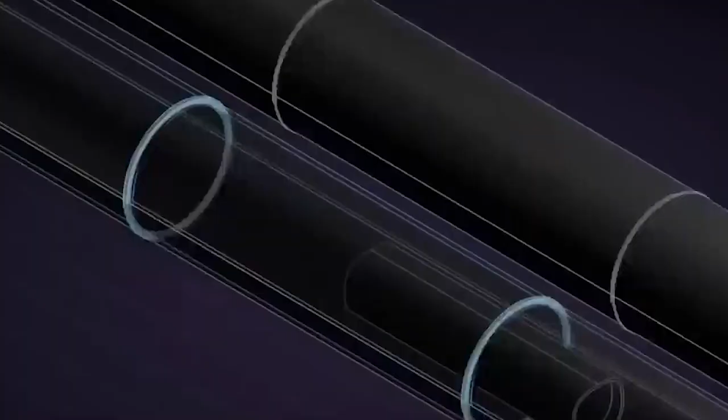Envision a journey across China that takes only 30 minutes and takes you from the country's political capital, Beijing, to its most vibrant city, Shanghai. Thanks to China's groundbreaking innovations in Maglev, magnetic levitation, train technology, this dream of unparalleled speed and interconnectedness is almost a reality. The planned ultra-high-speed Maglev train is a huge technological leap that will change how people travel forever, causing a stir all across the globe.

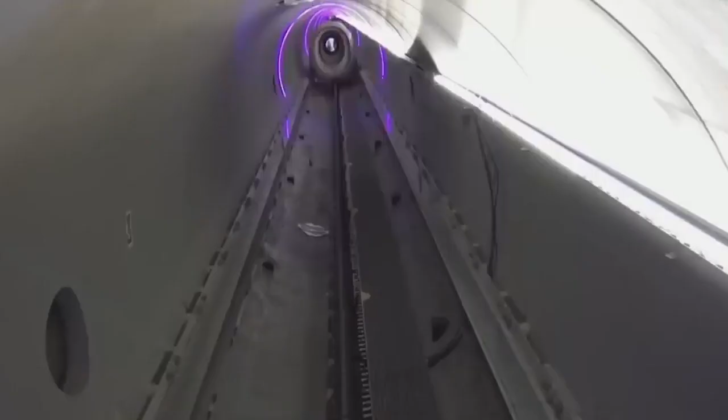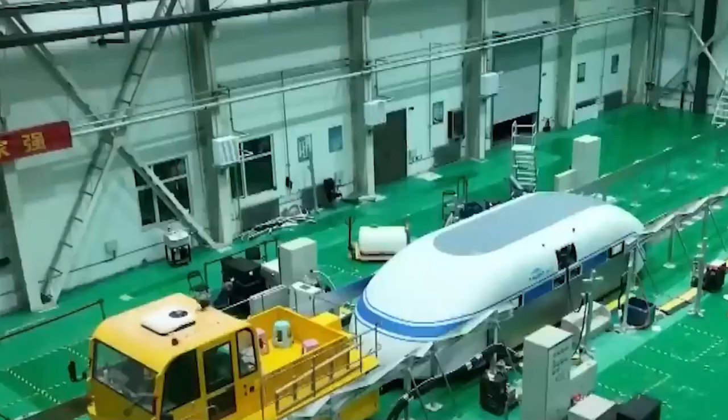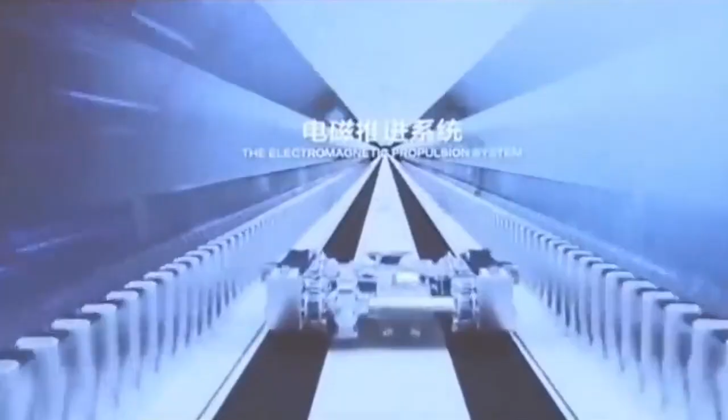The genesis of Maglev technology. Maglev, which stands for magnetic levitation, is not a novel idea. Magnets were considered a potential propulsion system for trains as early as the 1900s. The rapid advancement of this technology can be attributed to China's unwavering dedication to innovation. When it first went live in 2004 on the Shanghai Transrapid Maglev line, this innovative technology set a new benchmark for operational speed, reaching 431 km/268 miles per hour.

The ambitious leap forward. In modern times, China has lofty ambitions, including developing a Maglev train capable of reaching 600 km/372 miles per hour or higher speeds. This project aims to reduce the distance between China's two most important economic centers, Beijing and Shanghai, by linking them through an ultra-high-speed Maglev rail network.

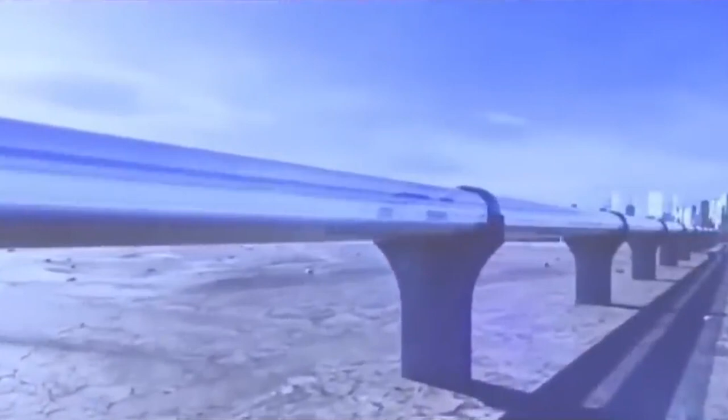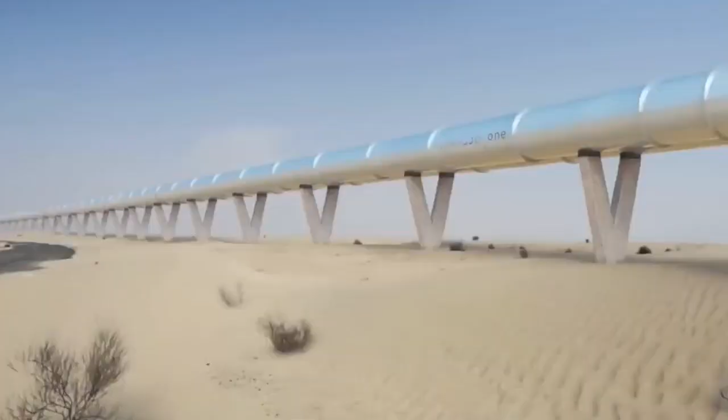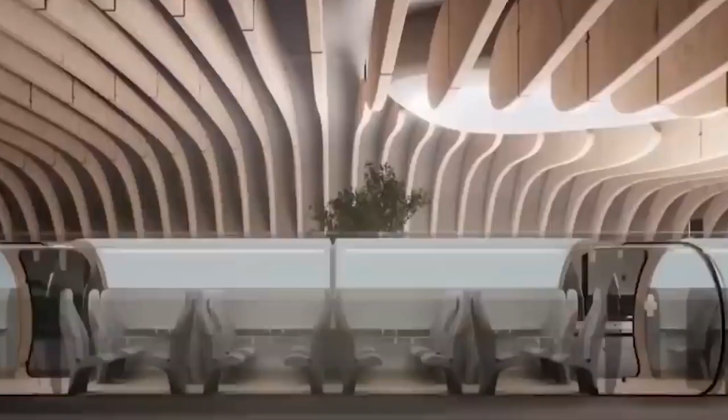Technological marvels driving ultra-high-speed Maglev. Maglev principles: how does it work? Central to Maglev trains is the basic idea of electromagnetic levitation. These trains float effortlessly above the rails, propelled by strong magnets that attract and repel one another. High speeds are possible since there is almost no friction because the train is not touching the tracks. One kind of Maglev system is the electrodynamic suspension, and the other is the electromagnetic suspension. The EDS technique, which relies on superconducting magnets to provide a steady levitation effect, is utilized most frequently in China. Liquid helium is used to cool these magnets to extremely low temperatures to retain their superconducting characteristics.

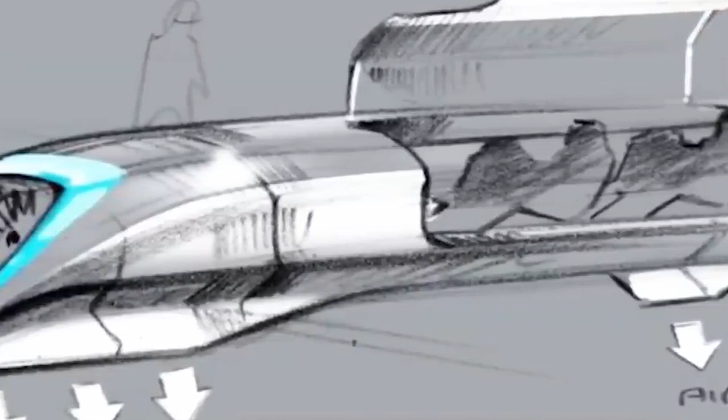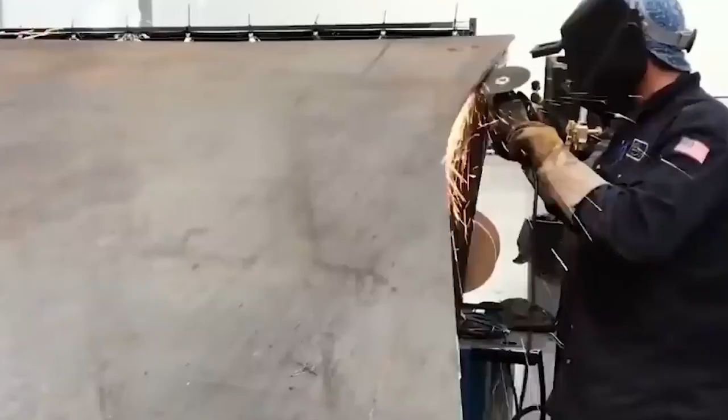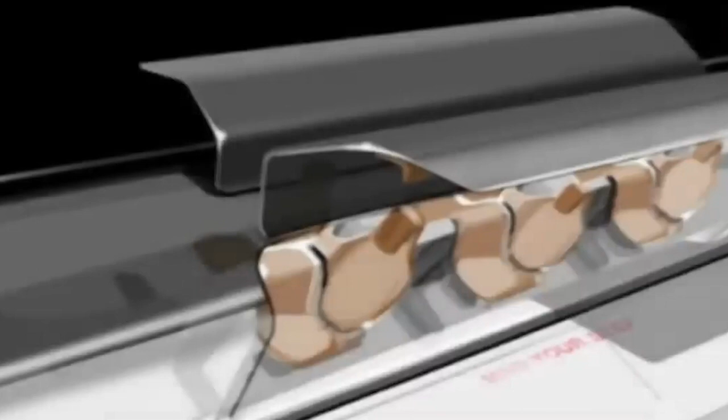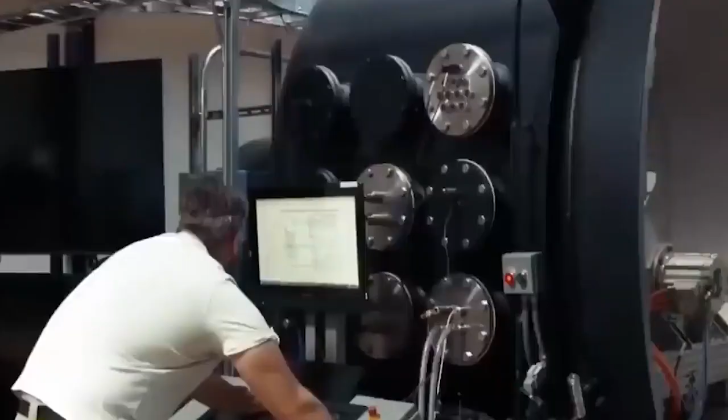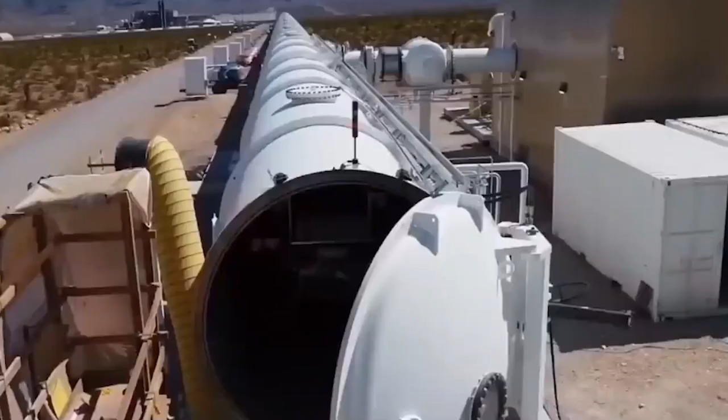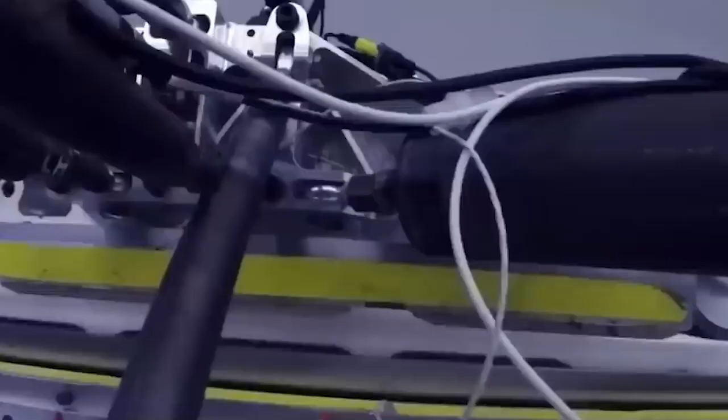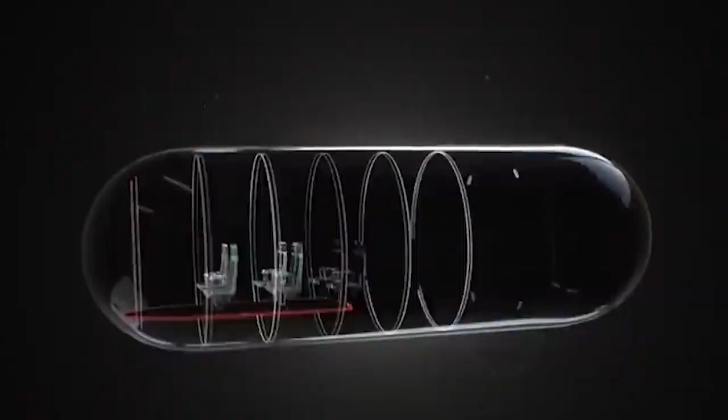Implications and benefits. Economic growth and development. Establishing a Maglev network that operates at ultra-high speeds between major cities in China is anticipated to bring about a transformation in the economic landscape. The reduction in travel times increases the efficiency of the movement of both people and things, promoting greater economic integration and increasing the likelihood of collaboration between regions. The improved connectivity may encourage the growth of secondary cities along the route, thereby establishing new centers for commercial activity and technological advancement. The strain placed on urban centers that are already at capacity could be alleviated by this decentralization, which would also help create more balanced regions.

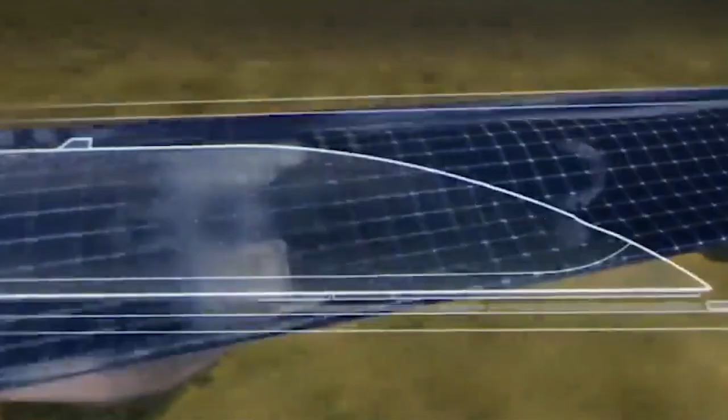Environmental sustainability. In addition to its incredible speed, the Maglev is exceptional compared to other modes of transportation because of its environmentally beneficial nature. It aligns with China's ambitious climate goals, since it eliminates direct emissions from engines driven by fossil fuels. Further reinforcement of the environmentally sustainable nature of the Maglev is provided by incorporating renewable energy sources to power it. Social and cultural impact.

The introduction of ultra-high-speed Maglev transit may have a significant impact on the norms and habits of society. It may alter how people perceive distances, making commuting between cities simpler and more practical. This might encourage the flow of cultural ideas, increase tourism, and allow people to explore living in one location while seeking employment in another.

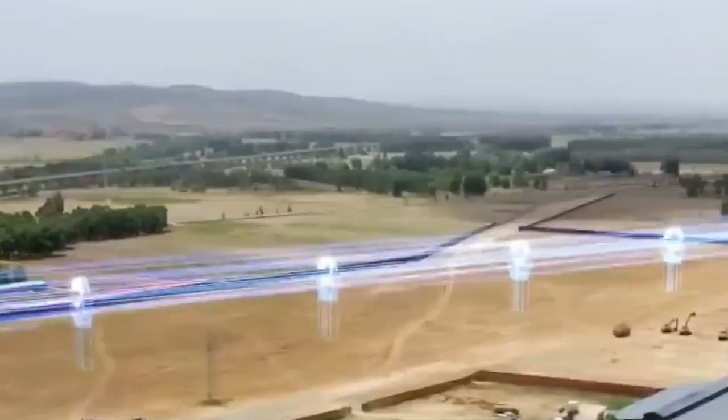Challenges and considerations in implementing ultra-high-speed maglev: Infrastructure and investment. A significant amount of capital is required to build a maglev network capable of maintaining speeds greater than 600 kilometers per hour. It requires the installation of specialist tracks engineered to stringent standards to guarantee they can handle the enormous forces and ensure safety at such high speeds.

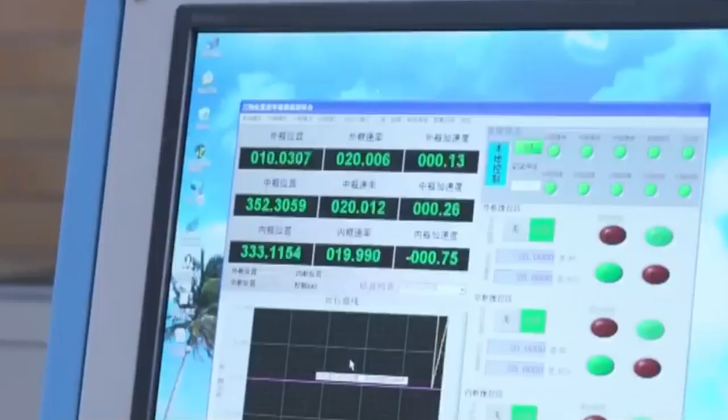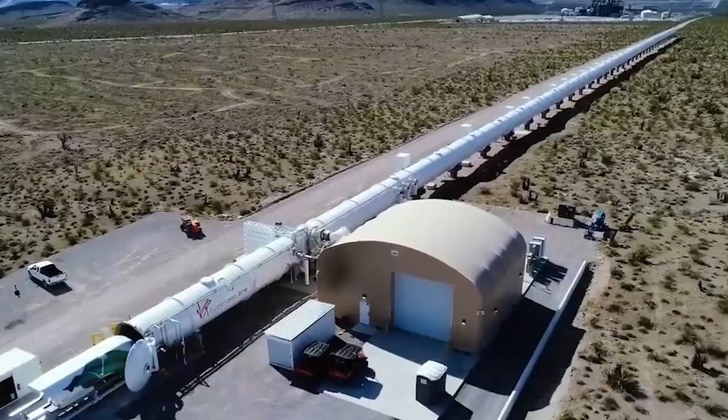An important financial obstacle is the expense of developing infrastructure, which includes building maintenance facilities and specialized stations. Proponents, on the other hand, contend that the early expenses are outweighed by the long-term benefits, which include increased economic growth and a lessened impact on the environment.

Safety and regulation. When dealing with speeds never before seen in the transportation industry, safety remains the most important concern. To ensure passenger safety, it is necessary to implement strong regulations, mandatory safety measures, and ongoing monitoring and maintenance. The maglev's technological complexity requires that testing and certification procedures be carried out with great care in order to successfully limit risks.

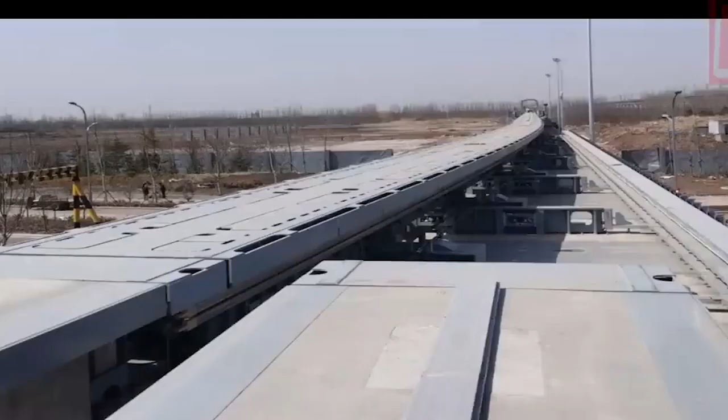Affordability and accessibility. The question of whether ultra-high-speed maglev travel is economically feasible and easily accessible raises important concerns. Despite the fact that the technology promises unrivaled speed and efficiency, it is of the utmost importance to guarantee that tickets remain available to a diverse range of travelers. It will take a lot of work to find a middle ground between providing this new means of transportation and making it financially viable for a wide range of demographics.

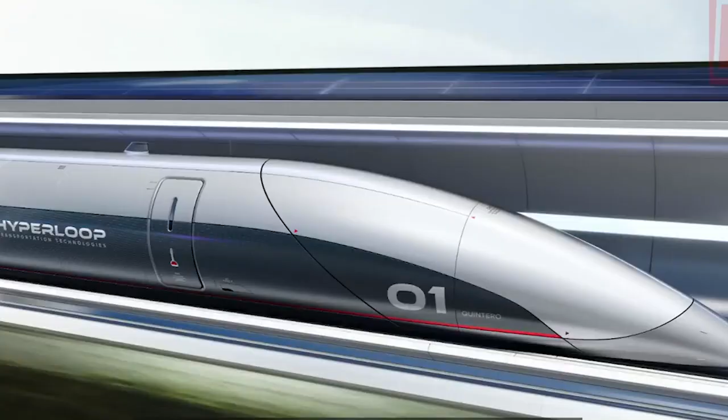Global influence and future prospects of maglev technology. The tremendous initiatives that China has been making in maglev technology have caused reverberations all over the world. A number of nations have expressed interest in implementing high-speed rail networks comparable to those already in existence. The accomplishment of the Maglev project in China, an ultra-high-speed transportation system, has the potential to act

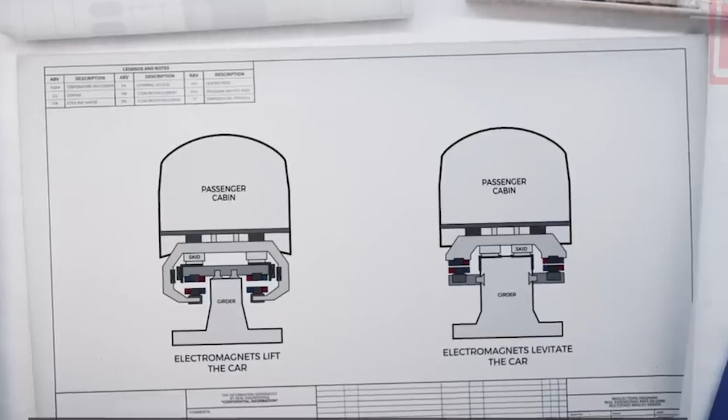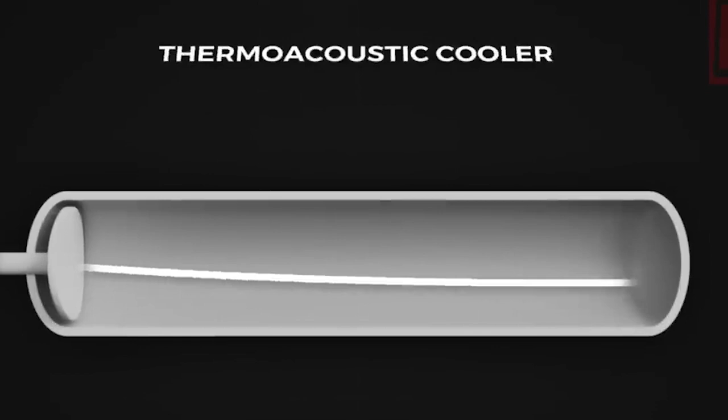as a catalyst for innovation in transportation all over the world. The nation's approach to high-speed rail networks could undergo a paradigm shift as a result, paving the way for a global transportation system that is more linked.

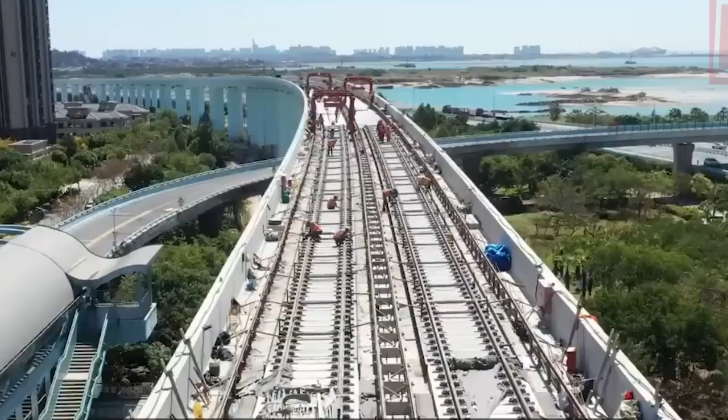The promise of ultra-high-speed maglev trains represents a revolutionary leap in the way we travel over long distances, despite the fact that there are still obstacles to overcome in order to make this magnificent vision a reality. The arrival of this event marks the beginning of a new era, one in which speed, sustainability, and connectivity will come together to reimagine the possibilities of modern transportation. In the process of accelerating toward reality, these futuristic trains are poised to transform the way in which we understand and experience travel on a worldwide scale.